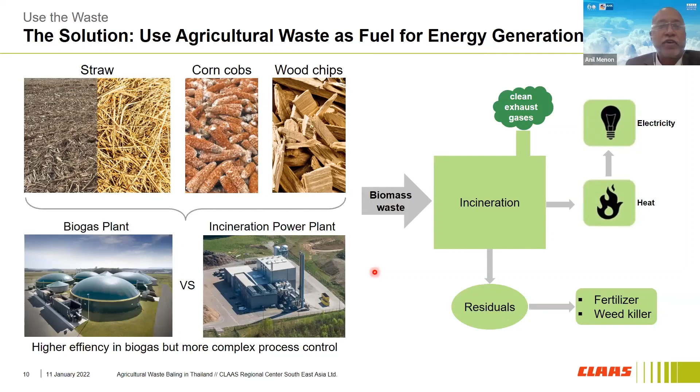Converting straw and agricultural residue into power. So what's the potential for this? What kind of biomass are we talking about, and what are we really burning off?

We actually see that trash makes up about 10 to 15% of total biomass. I'm talking about sugarcane, but it can differ a little bit when we go to other crops like paddy. Paddy is actually higher, but in sugarcane it's about 10 to 15% of total biomass. The untapped potential in Thailand is about 1.8 million hectares. That's basically unlimited, because we are the 4th largest sugar producer in the world, and we have a limitless supply of sugarcane trash, because it's just the stalk that's used for cane production, year after year.

If we want to convert this sugarcane trash into money, just to get a feel of what we're burning off in every rai of these fields, this is a very rough but good estimate of the money we're burning off. We have about 7 tons of trash per hectare—this is just the trash, because the cane itself could be about 100. If you look at the heat value, it's about 15 megajoules per kg of this trash, or 4.16 kilowatt hours per kg.

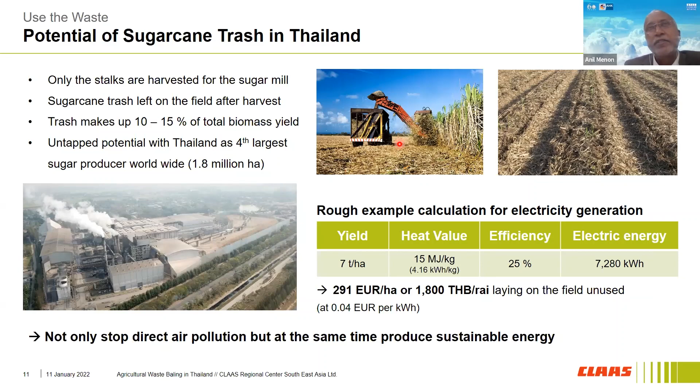That's where residue like cane trash or paddy straw really come in. They can help power generation through the year, and then these sugar mills actually become power plants, continuously supplying energy to the grid. We've just discussed some parts of this—now going into a little more detail on the process where CLAAS comes in, or companies like CLAAS, where the equipment or machinery comes in as a solution provider.

The challenge we have in trying to manage the loose straw, whether it's paddy straw or cane trash, is really the material lying across a large area of the field in loose form. Collecting and transporting this needs professional equipment, because if you don't have such equipment and try to do it manually, that's a huge cost. It makes no sense spending a lot of money handling the straw, because then the whole process is not viable.

Another thing is, if it's not compact enough, transportation is very expensive, and by the time we get the straw to the gates of the power plant, we've already spent a lot of money in freight. Then it's not viable for a power plant, because for a power plant to be economic, they have to compare the cost of bales delivered at the gates with other sources of energy, like coal or other things. So they have to make an economic decision as to what to choose.

Balers help collect straw, compress it, and make it into bundles that can then be effectively transported to power plants where they are needed, in a very cost-effective manner. So what's the process chain?

Swathing is the first step, and though it seems easier, it's actually the more essential part, so that baling becomes effective afterward. Swathing is the process where loose straw lying across the field is swept into swaths or lines, so that it can be more efficiently picked up by the baler that comes after.

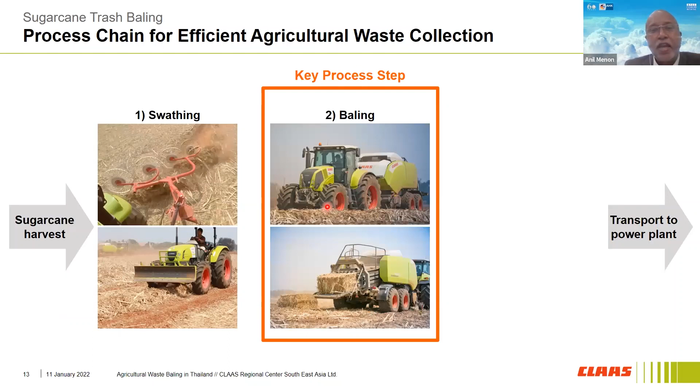This is the key process, where the baler goes over these swaths or lines, picking up the straw, compressing it, and then dropping it off as bales, the compressed form. These bales then need to be collected, which is the material handling part, and then transported to a power plant.

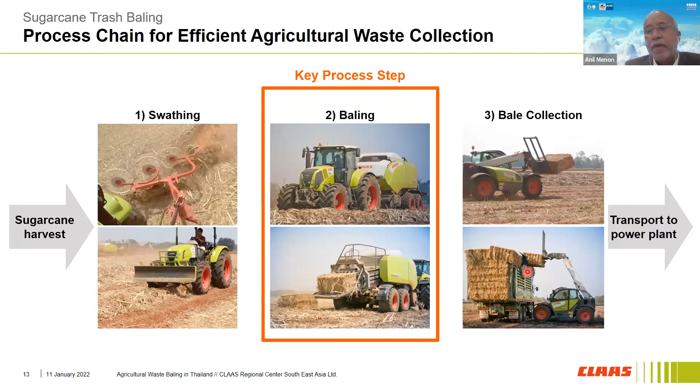So this is the simple process chain that makes it possible for loose paddy straw or sugarcane trash to ultimately become, let's say, almost like bricks that are transported to power plants. Now let's look at a video we have from Thailand, so you get a feel of how it looks in actual practice.

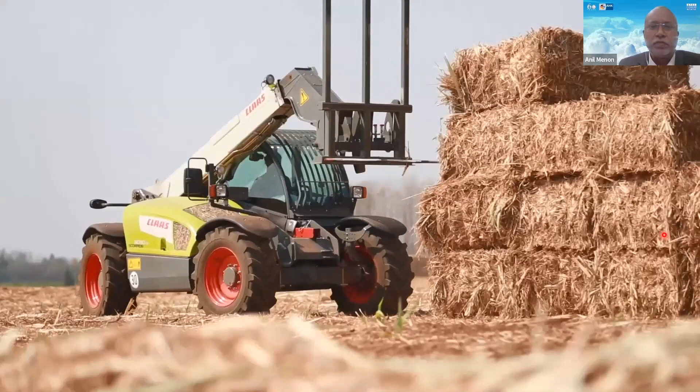So that was some actual footage from the field here in Thailand, just to give you an impression of what the equipment really does physically. You're all welcome to see these machines working in the sugarcane fields right now, since the season has started and the balers are in action.

So there would be some basic questions as to the size of the bale, the weight, and the tractor horsepower. We won't go into too much technical detail, but we are available for more detailed discussions. To give you a feel, these bales are about 350 to 500 kg per bale, depending on the pressure settings.

We could vary the length, going up to 300 centimeters, and that's adjustable. The cross section is about 70 by 120 centimeters. So fairly compact, driven by a tractor of about 150 to 200 horsepower, making it very efficient to stack, transport, and later store until it's finally used in a power plant.

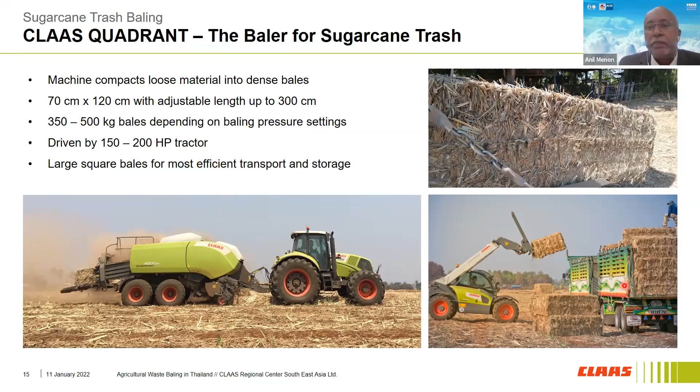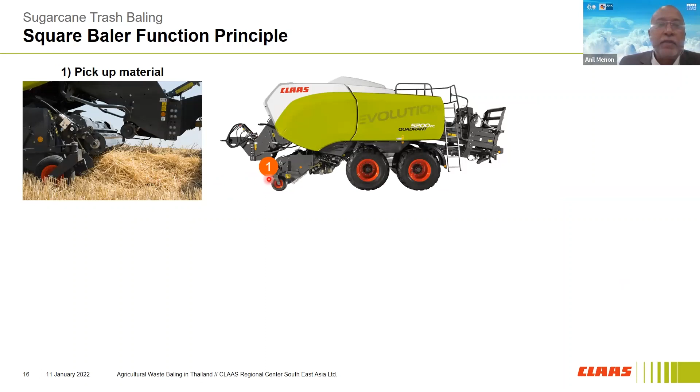So just 4 key steps that go on in a baler, for the curious colleagues including some from the university. The first step is picking up, where the straw put into a swath or line is picked up by the baler. The next step is where it's fed into the bale chamber, where it is finally compressed.

There's an interesting part that comes at the end in these large square balers, which is the knotter. A knot is tied around so that these bales are held secure. This makes it possible to stack, store, and use the bales even later when needed. So those are the 4 main steps of how a square baler works.

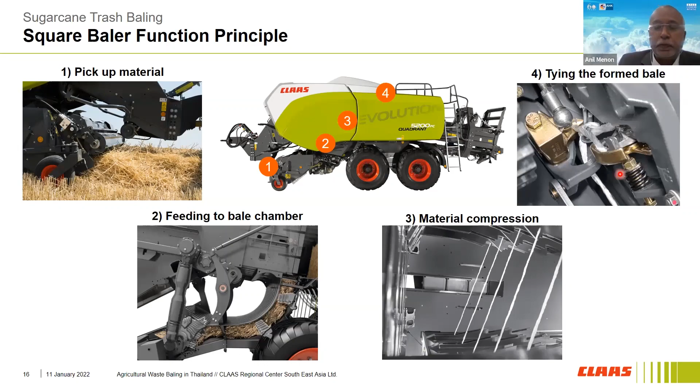I showed you an image or video of the Quadrant, which is a CLAAS square baler working here in Thailand, but it's not just one, and I'll share more details in a minute. What's more important is to understand some of the engineering challenges in the process, because sugarcane trash baling is quite aggressive due to the field conditions.

We've been in Thailand since 2015, but the Quadrant balers themselves have been in use since 1988, so that's quite a history of the machines. If you were there in the field at the time of baling, as the video showed, the level of soil content in the crop is quite high, partly because of the way the straw is raked or swathed.

The video I shared with you is that of a mechanical rake where some amount of dust is kicked in or pushed into the bales in the process of making a swath. We of course have more efficient solutions using the CLAAS liners where the dust is not put into the swath. Even then, you cannot completely avoid some level of dust in the process of baling.

Here's a picture from Thailand where you can see a very high level of soil content in the process of baling. The sugarcane trash and stalks themselves could have some left on the field. They are quite hard, could be mixed with stones, and the trash or leaves themselves are abrasive. All this combined contributes to a fair amount of load on the baler.

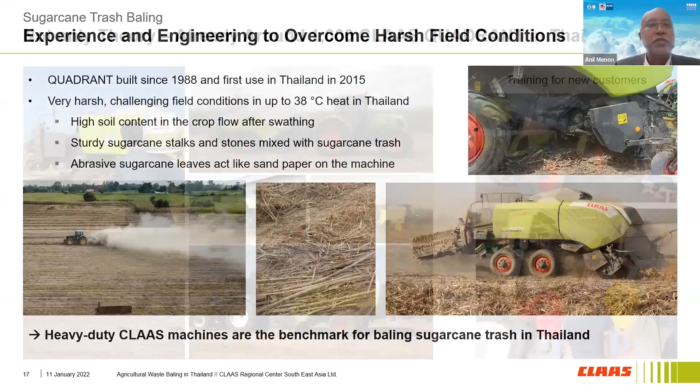What we've learned over the years from Thailand has helped make the quadrant stronger and stronger, until today we have a machine that is ideally suited for conditions of sugarcane trash baling in Thailand. And what is the number of such machines we have in Thailand? We have about 1,000 CLAAS quadrants already working.

These are pictures in the field, and what makes it possible for these hundreds of quadrants to work is of course the backup we provide from our dealerships in terms of aftermarket support, like trained people, spare parts availability, and so on. This makes these quadrants work through the months from December to March, April, May even sometimes, without too much of a challenge. Of course, there are downtimes because of the conditions, but we can provide backup through our staff and dealerships.

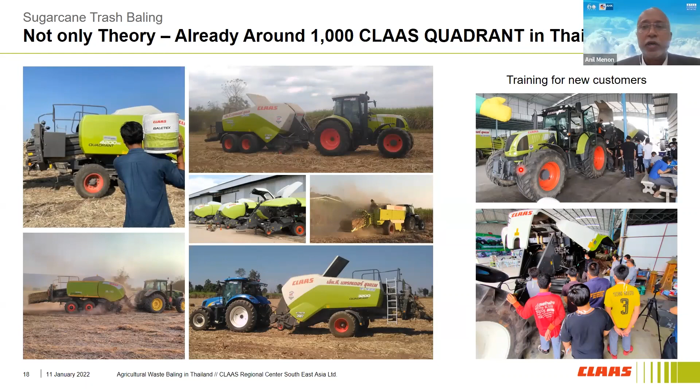So it's not just the quadrants. We also have other ranges of balers, like the smaller square balers. When it comes to paddy straw baling, the Markant would be ideal, because paddy fields are a little different - they're smaller, and the conditions are different from a typical sugarcane field. So there you have the ideal machine: the quadrant, and the Markant, which is lesser in weight and more ideally suited for smaller fields.

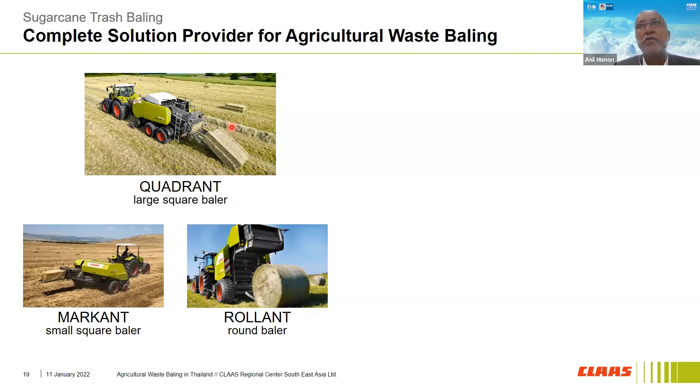We also have what is called a round baler, or the Rollant. We do have Rollants working here in Thailand as well, so that's the other option where you have round bales. The benefit of a round bale is that it doesn't compress as much - the amount of abrasive impact is lesser, and therefore lesser maintenance and wear and tear. But then they have the challenge that it cannot be as easily transported and stacked as a large square bale, because a large square bale is more dense. So you have pluses and minuses on each side.

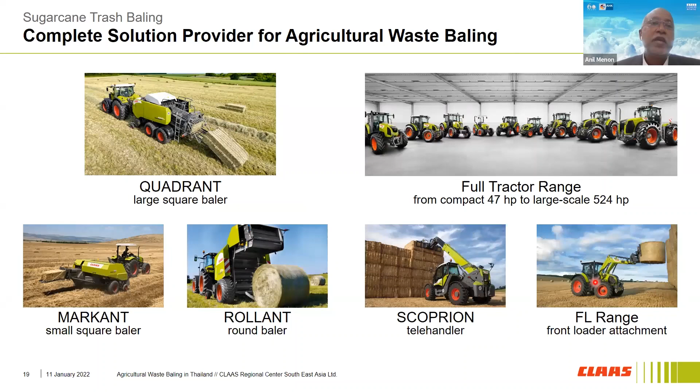And then, of course, we do have the full range of tractors, material handling, and front loader arrangements, etc., to be a full solutions provider for the entire process. So the question is, we come back a little onto the economics without mentioning numbers. We'd be happy to discuss numbers, but we would then need a little bit more time, so here I'll give you the top bird's eye view of it.

So the question is: is it profitable and is it viable? The very fact that we have 1,000 balers working is already the first indication that it is a profitable business for contractors. And the sugarcane trash, used in biomass power plants, is a constant demand from sugar mills. So there's absolutely no issue with demand - the mills are actually running at less capacity than what they need, because by some estimates, when we talk to officials from the mills, the impression we get is that they only get 10% of their demand for cane trash.

So there's no lack of demand, and there's no lack of supply. We have a limitless supply of sugarcane trash - 1.8 million hectares - and farmers are happy to sell if they are paid for the trash collected. They would be happy to collect that money rather than burn it, and then of course it's a win-win situation.

So there's a demand, there's a supply, and of course you have the contractors connecting the two—these are the people who invest in machines and are willing to pay by some indications. But when we go out into the field and see the actual amounts, the feedback shows this process is working. Farmers are paid sometimes 50 to 100 baht per ton, a little higher or lower depending on the location. Sugar mills or power plants pay between 800 and 1,000 baht per ton. So it's viable and productive for the sugar mill, the farmer, and the contractor. We have all the basic ingredients for a successful business model: great demand, limitless supply, people willing to connect, and equipment available to connect.

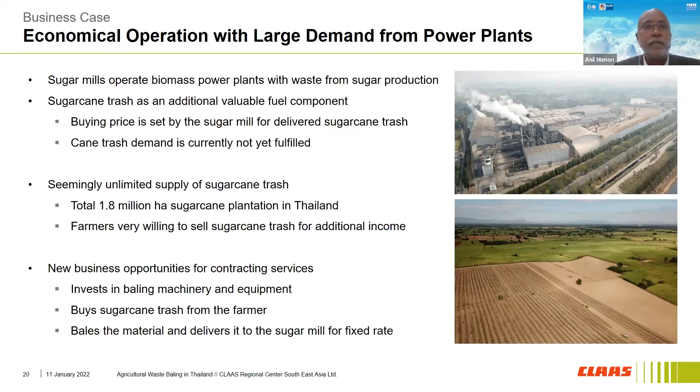So where does the government come in, and what can they do? To be fair, the government is aware of this. They're already taking initiatives, and we see steps in terms of government intervention and support. The fact that senior officers from the ministry are participating and cooperating with the AQI initiative is already an indication. But a lot more can be done to accelerate adoption, and this is where all of us can play a role, because it's really the most cost-effective way of addressing the issue—addressing the core of the problem. The 6% of GDP loss can be addressed, and it's not just economic loss; it's also loss of life and reduced lifespan, which we know is the result of all this.

So the adoption rate already there is a clear indication of a profitable business case. We do have demand, but the challenge is for contractors to invest in equipment. There's an initial investment, though the payback can be fast—3 to 4 years, based on practical experience from contractors. These are very realistic calculations. But the challenge is not all financiers understand the model. They have hesitation in financing, and this is something that should be eased out. There are some financing models available, but this can be amplified.

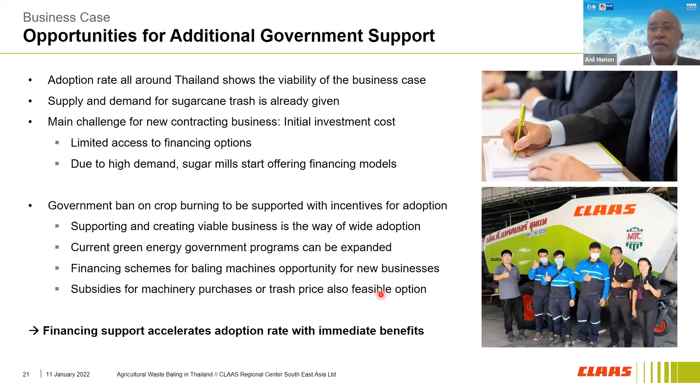So the government can come in, in addition to bans and punitive measures—what we need is incentives for a higher level of adoption. Some of it could be subsidized finance rates; we already see examples where rates are subsidized down to even 2%, sometimes less. Another option could be direct subsidy on the equipment itself, or subsidizing the cost of cane trash paid for by the power plant—if it's 800 or 1,000 baht, the government could subsidize a portion of that. There are multiple ways interventions can be made and accelerated to ensure a higher level of adoption. It's really a win-win situation for all.

We know power plants need it—they get a local, cost-efficient, sustainable source of power production, since this happens year after year as long as sugarcane or paddy production continues, which it will. So the power plants would be happy. The farmer would have additional income and wouldn't be punished for burning; rather, he'd be rewarded for not burning through incentives. And then you have contractors willing to connect the two, provided we give them a little help for easier adoption.

And like Andreas mentioned at the very beginning, steps to reduce or mitigate air pollution do not necessarily mean a loss or negative impact on the economy. So this is really what I wanted to stop with.